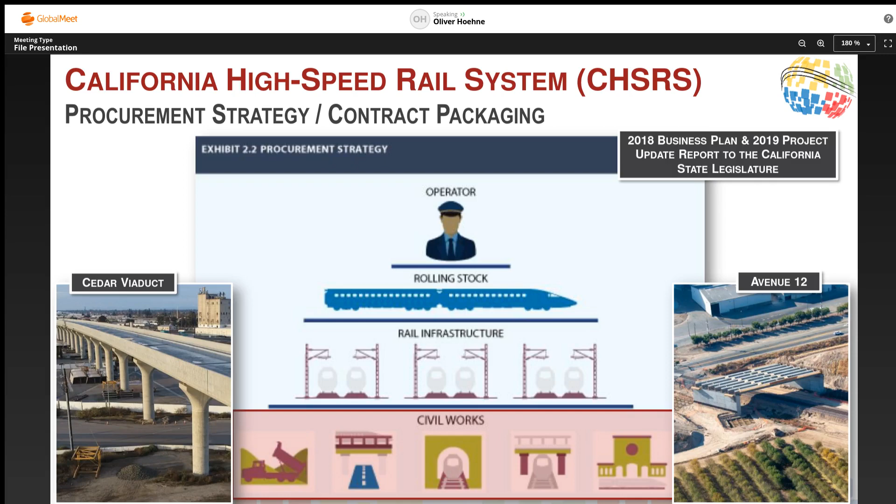And so now let's talk about why high-speed rail is a system of systems, right? High-speed rail, the whole program, is technically even a system element of a much larger system. And if you wonder why, take a look at this one here. It's just one of the YouTube videos you can see.

What you see is we have adjacent railroads, typically freight railroads, and you can see in the upper right corner where we have to cross over a freight railroad. You have adjacent highways. You saw already what we call a grade separation, where the roadway has to be relocated. We have power utilities, which bring in the power to feed the electric trains. California is earthquake country, so we will have to have seismic detection, but we're not going to build a new system. We tie into an existing one.

So that means high-speed rail itself really depends a lot on other things, the context, right? And it's something that we sometimes seem to forget when we build a system. It's fun to build a system, but it has to tie into the existing environment.

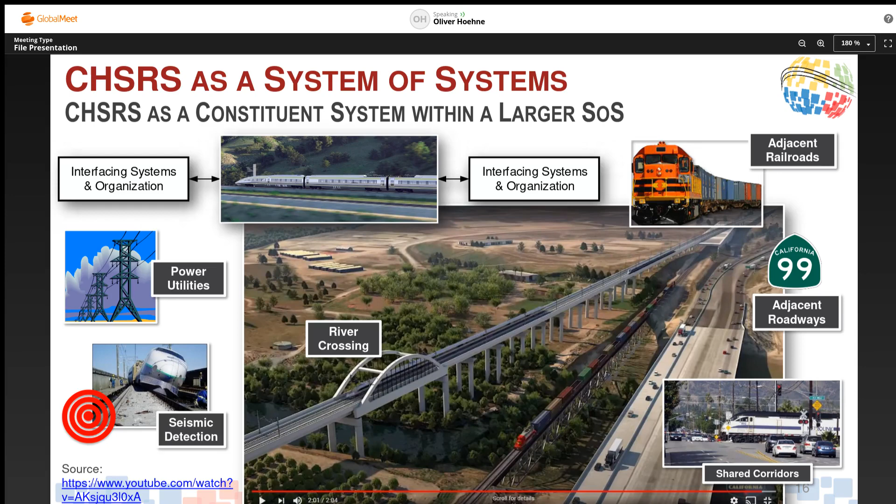Another level of why high-speed rail is a system of systems, and in this case what I would like to call a program of projects: once you take only the high-speed rail portion, you can see that on the program level it's broken down into a number of projects. Those projects, whether civil works, track and systems, or train sets, are basically the constituent systems of a system of systems.

So you can argue that the high-speed rail system itself is a program or a system of systems, of which the projects, the constituent systems, are the parts, right? And so not only do we have to plan for all of those procurement packages, contracts or projects, however you want to call them, but we also have to integrate them at the end of the day.

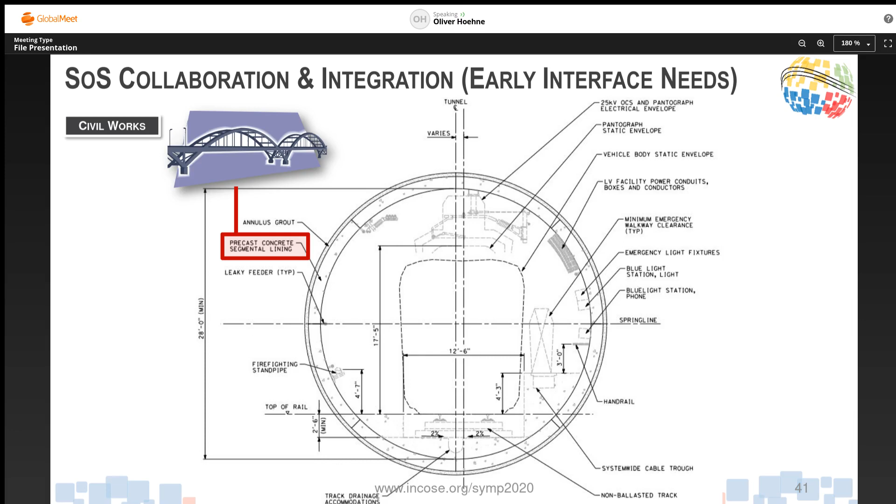Every inch of foot costs millions and millions of dollars. I kid you not, yeah? And so they're obviously trying to optimize it to as small as possible, but also as big as necessary. And so the things that need to be considered, for example, what you see here is the actual size of a train set, right? Which is a train set contract.

You need to know for safety, security purpose or maintenance purpose, you need a walkway, right? How big is the walkway supposed to be? The track, right, the train is going to run on. Is it ballasted track, non-ballasted track? Any system you put into the tunnels, like the radio system, it has to have a certain distance or clearance from the trains, the power systems, you name it. So there's a lot of things you need to know up front in order to design the infrastructure correctly.

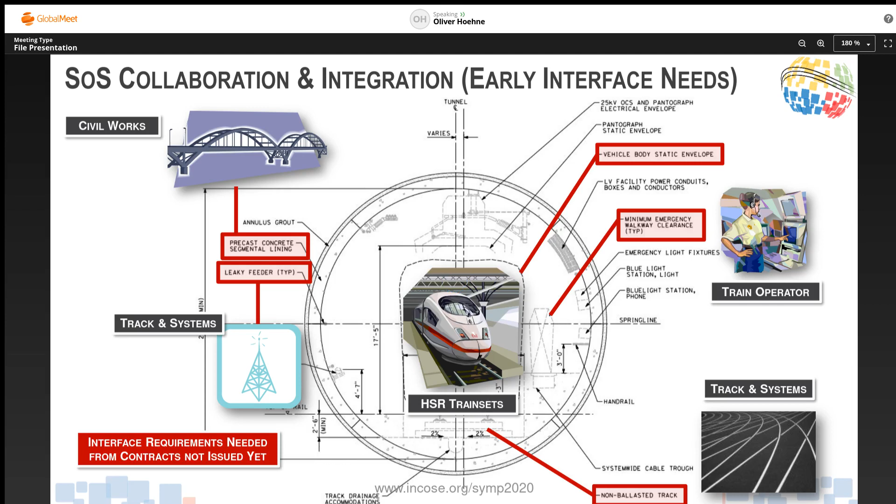But how do you do this if nobody wants to be specific, right? Especially with those contracts that come later on. And so basically, the conclusion here is the interface requirements are needed early on from the contracts that are not even issued yet, right? Which is the key challenge. And last but not least, the emergence we talked about, which is the key challenge.

So what I'm showing you here is basically a cross-section showing a trench. It's like a tunnel without a lid, so to speak. Typically, that's the configuration you see in New York with the subway systems, only that in this case it's open, right? And so this picture you see here is what was put into the contract as a scoping document, meaning this is what we would like to see, right? They're identifying all the key elements and saying, hey, this is the trench, and here are the key pieces, and this is what is part of your contract, and what's not.

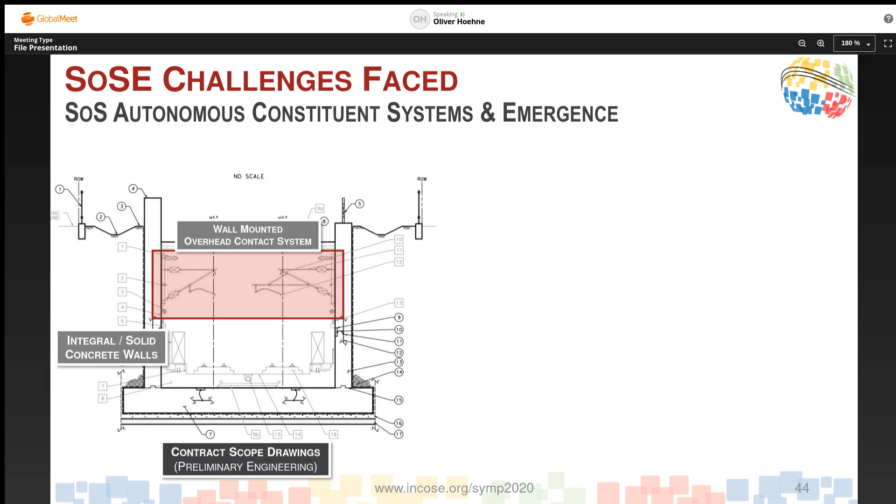But what you see is very, very solid foundations, right? Very solid walls. And what is highlighted here is that the overhead contact system that is powering the trains is wall mounted. And so when the contract was done, right, this is how it looked, completely different. So the idea of putting the catenary to the wall was completely dismissed. And so if you take a look, you can see over here, the actual wall is that thin strip here. It's almost like wallpaper.

So what they did is they decided to use piles and put them into the ground every so often, and then just put a little bit of, I don't want to say cardboard, on top of it, but a very thin wall. And obviously, again, this is all about saving money for the contractor. And because of that, they had to redesign the complete overhead contact system. And the challenge here is to make sure that all those interfaces, all those needs from future contracts like catenary, walkways, as you can see, right, they're all still adhered to.

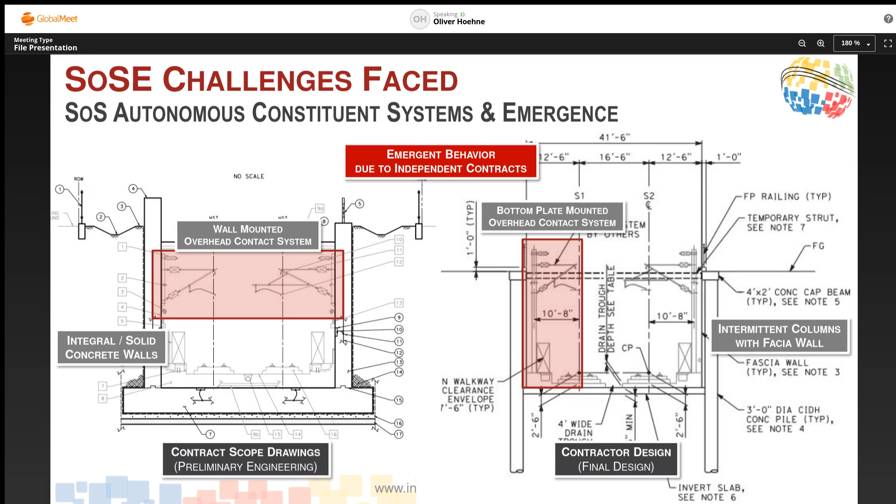And if you're not careful and not specific, the contractor's going to squeeze you as much as he can, right? So the point here is that those pieces that have to come together as one program are so flexible and ever changing, and you have to be careful that they're still integratable at the end of the day. Anyway, so let's talk about the activities we performed to address those challenges.

So the first step is we performed what we call an international best practice review, and so we looked into basically global high-speed rail, especially Europe, obviously, and Asia, right, where those trains are run.

And at the end of the day, I'll show you, we settled for one good documented system. And then I want to talk to you about the SoS integration strategy, and then also a step-by-step walkthrough of how this all works. So the first step is obviously in Europe, right?

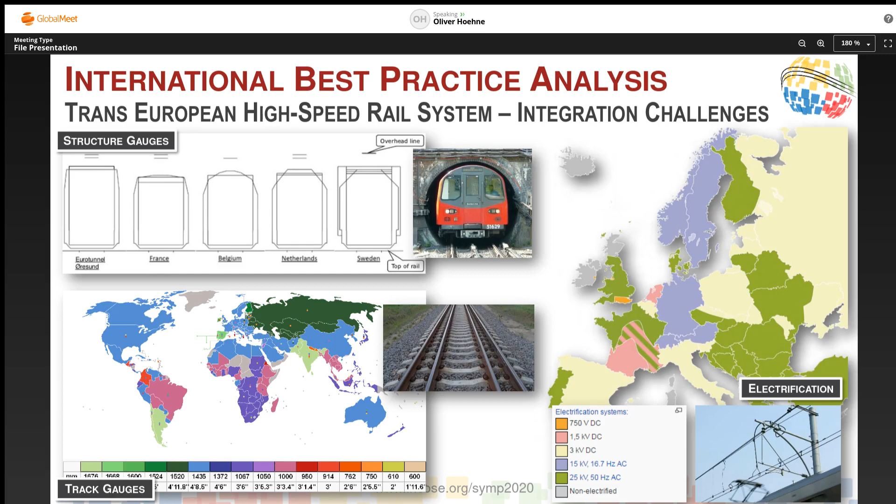There's different track gauges. For example, in Spain, they still have a different track gauge, different power systems, AC, DC, you name it, all the different voltages. And so nowadays you have the European high-speed rail system integrated, and we were wondering, they did this. So how did they do this, right?

And so I'm showing Eurostar, and in all fairness, Eurostar was actually one that was developed in the 90s and still was really hampered by all the different standards. But at the end of the day, the point is nowadays you can really go from London to Paris to Amsterdam, you name it, right?

And so what the Europeans did in '96, they issued what's called the technical specifications for interoperability. And that's really kind of the key source of where we got our thoughts and ideas of how to integrate high-speed rail in the US and California.

So what those TSIs, again, the technical specifications for interoperability, did, they broke the whole high-speed rail system into 8 subsystems. 4 of them they called structural subsystems: infrastructure, energy, control, command, and signaling, and rolling stock. And then every subsystem really was described using the same format. That was really helpful.

And so section 4.3, if you can see it, for every single one of those describes the functional and technical specifications of the interfaces. And so this is obviously, it says down here, the one for the infrastructure. And then in a very similar fashion to an N2 matrix, let's say, infrastructure interfacing with rolling stock, and then interfacing with energy, interfacing with, you get the idea, right?

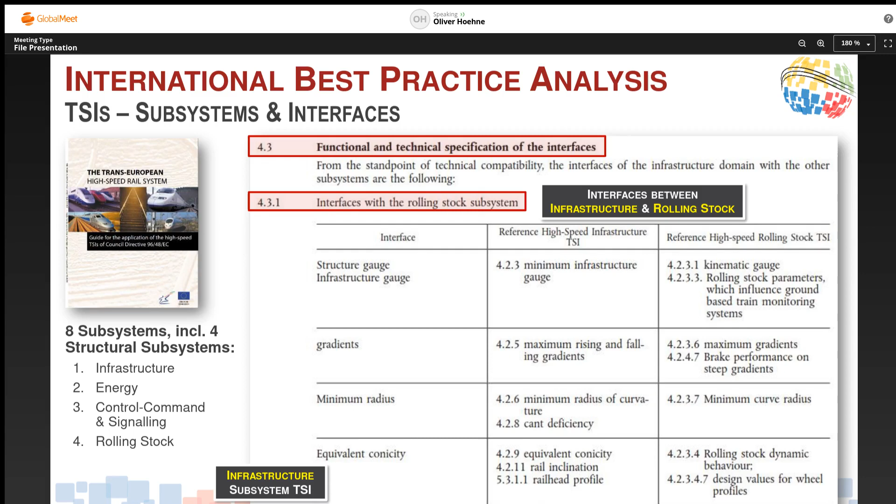And then in there, they're actually listing all the interfaces. And so you can almost say this is actually a collaboration in terms of system of systems, how they developed this. There was not really one document that went into all the subsystems. Every single document had a cross-reference to the other ones. But it was still very helpful identifying the key interfaces over here, and then making reference, in this case, to the infrastructure document and then to the rolling stock document.

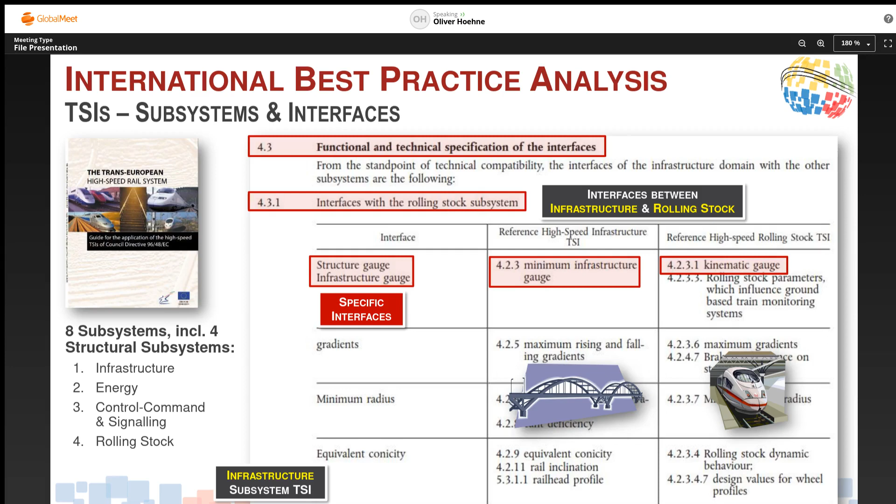And I'll show you on the next page. Basically, if you pick this one interface, which I'm using as an example, now making reference to those documents. So you can see it says structure gauge over here, and then it says, infrastructure TSIs go to section 4.2.3, which is this one over here. And then it says this interface between those two parties, the interfacing party is rolling stock. And then rolling stock go to section 4.2.3.1, which is this one over here.

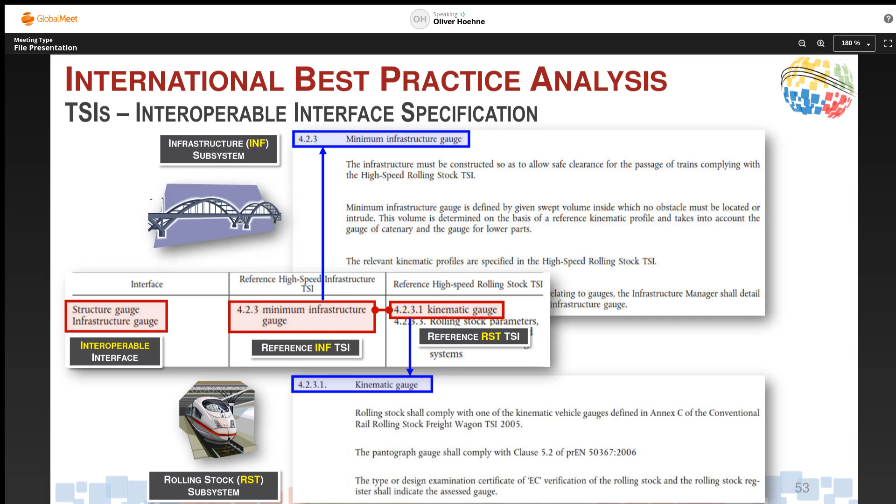And then both are basically described in the way that if every party did what they were supposed to do, you would have an integrated system at the end of the day, right? So one described the infrastructure, one described the train sets. And if every single one did what they were supposed to do, it should work.

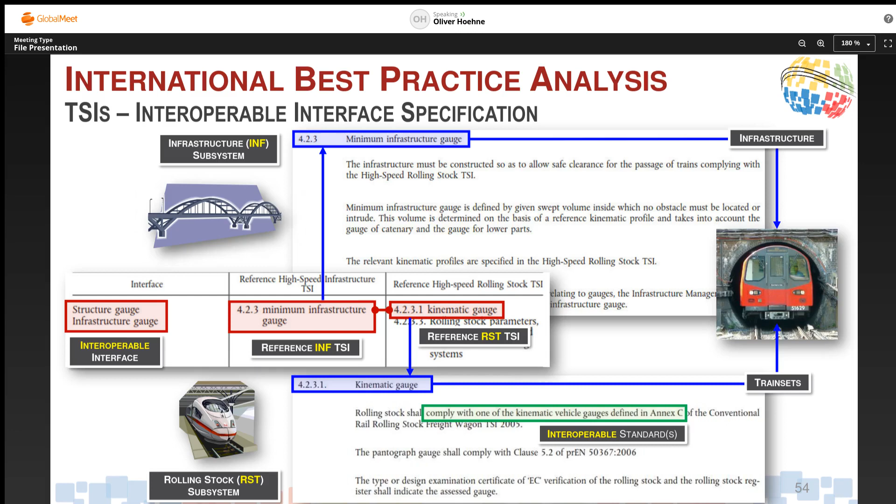And then either they described the interface requirements or implementations directly, or made reference to appendices or even acceptable standards that are out there. So in this case, actually, making reference to an appendix, which describes the interoperable interface standard. And so we really thought this would be very powerful, especially following that example.

And from an authority perspective, obviously the integration team was authorized to do integration, and that's mostly understood as technical integration. So nobody argued with us doing the technical integration. So we basically just ran with it and had at least the felt authority to be allowed to do the integration even across the organization. So we're focusing really on technical.

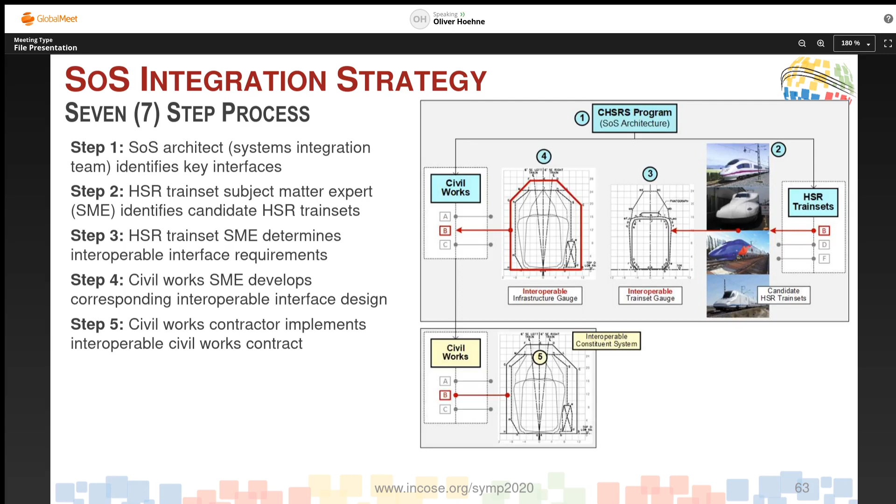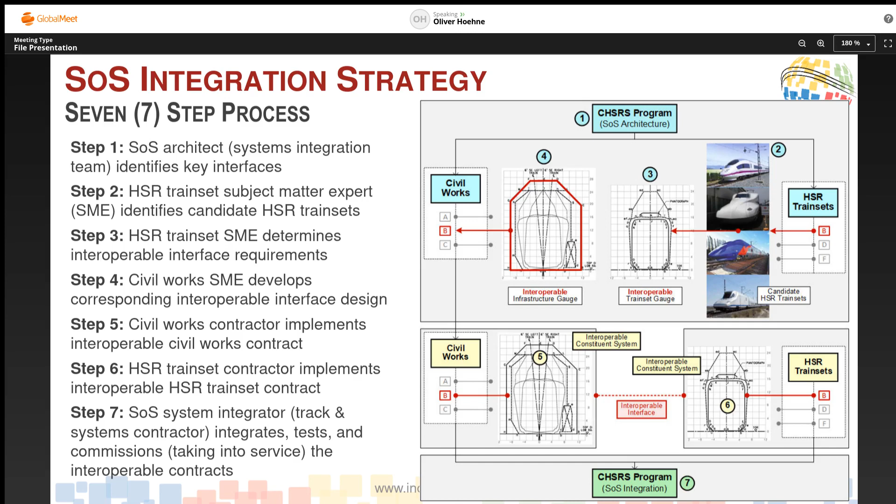So it's being delegated quite often. Anyway, so let's go through step by step, right? Step 1, identification of key interfaces. As I told you already, this is the architecture over here. Can you see the 4 key packages or elements?

And this example would be between the train sets and civil works. And if you can see the B, right, this would be basically the B interface. And it's not only one interface, it's a whole slew of interfaces, you will see. And so basically what we would do is we would make sure that we identify the interface requirements and then make sure that the interfacing party would design the interoperable design, so to speak.

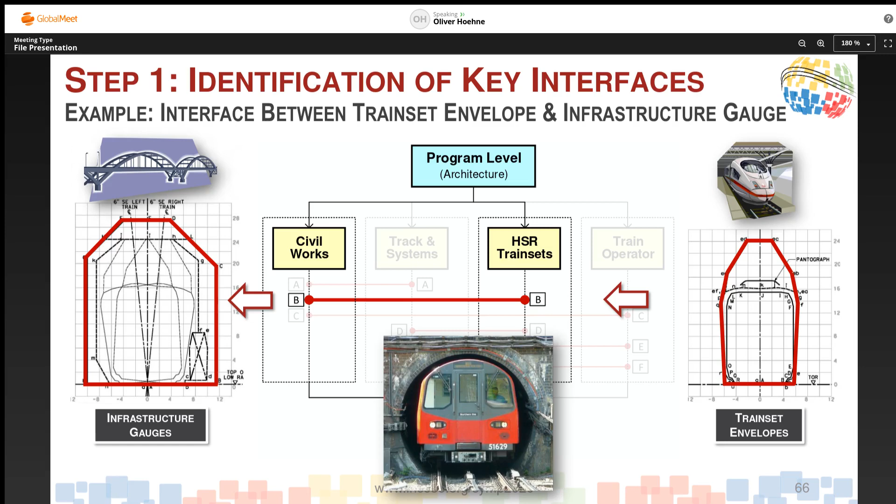So it's still step 1, identification of key interfaces. I showed you earlier, and I just mentioned also, that the TSIs are independent documents which cross-reference each other. And so one of the first steps, years ago, at least 8 years ago, we developed an interface register by doing nothing more than identifying all the interfaces.

So this one over here, can you see, this is TSI infrastructure interfacing with rolling stock. As you can see, it's all done in DOORS. And that's tracing directly to the TSIs, which we all import into DOORS. So now you can filter, can you see it says here infrastructure and rolling stock. So you can filter for all various types of interface, let's say possibly like mapping.

And then what we did is we tailored those interfaces, and we looked at every single interface and said, is this something that should be of concern to us, right? So you can see this is one interface over here, but we created 2 in our own interface register. So we separated the static gauge from a dynamic gauge, meaning one train basically not moving and then the train moving, as 2 different interfaces. And then that resulted in originally 49 infrastructure interfaces to rolling stock, or actually only infrastructure interfaces, of over 100 interfaces that we tracked in our own project.

So if you recall, if you ever go through the CSEP certification, never ever use a baseline from a different project without tailoring. So you can't just copy and paste. You have to think of, does it make sense or not?

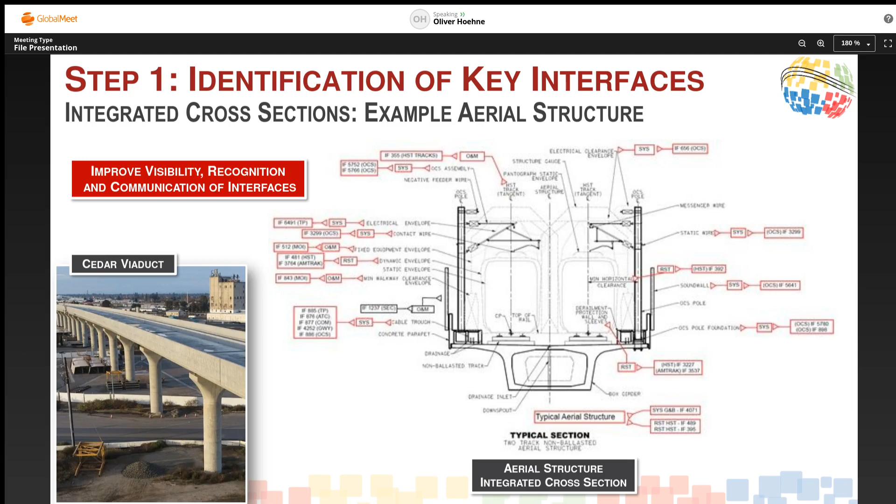And as you can see, look, this is a full build-out, right? And this is only what the civil guy built. So we better make sure that all of this stuff, right, can be built later on here. I mean, if you ever have to go to hundreds of miles of infrastructure and modify that, that would be a very costly mistake to make.

And then what we did is the next step, developing the interoperable interface standard. So in this case, you have a Shinkansen, for example, right? And then you have a TGV. And so you can have double-decker trains, and you have the Shinkansen extra wide. So we couldn't really rely on existing standards. So basically what happened is we developed our own standard, right?

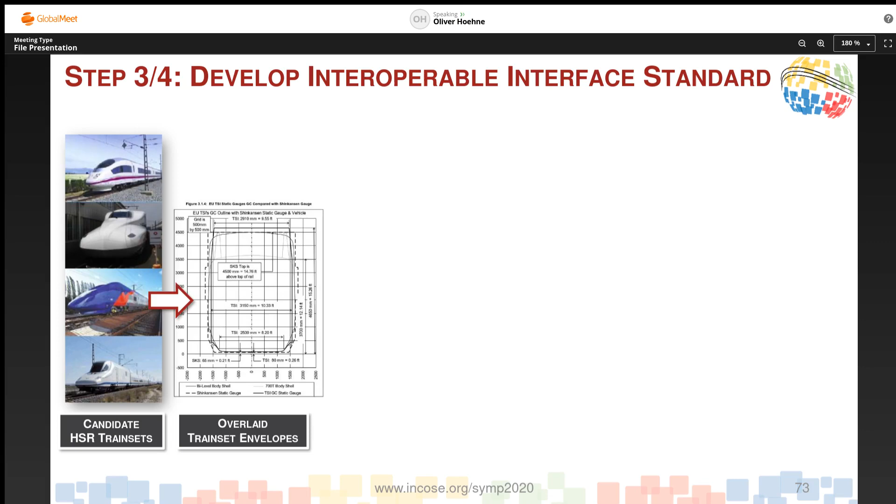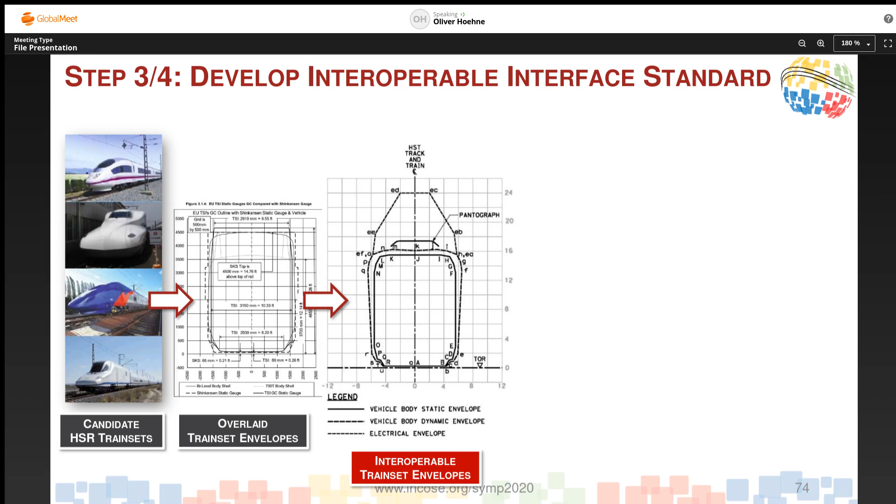By just even overlapping all the different envelopes, and then developed one that became our standard. That's really the interoperable train set envelope. And as you can see, it looks like a train. And this is all about the catenary and the pantograph. And then finally, last but not least, taking this one and deriving the actual infrastructure needs out of it.

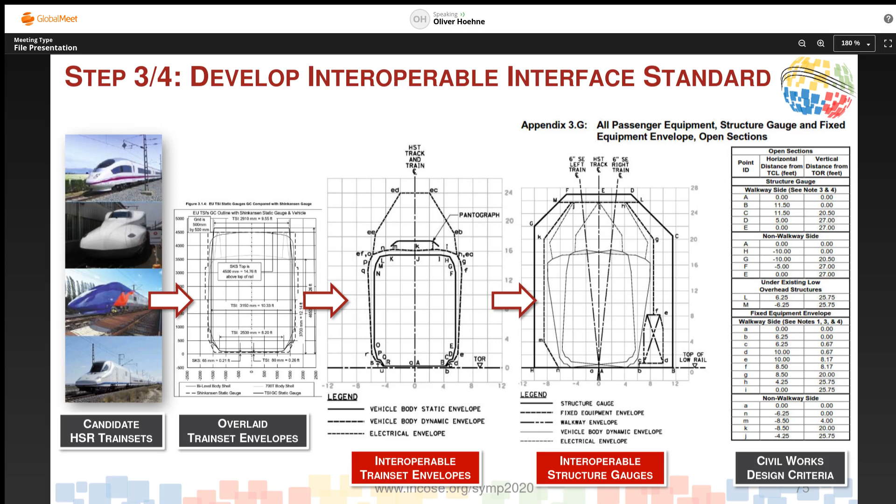And then obviously the trains, if you ever took a train and go into a curve, the train leans into the curves, right? So you have to make sure all of this works. And so this is step number 4 already. And so now step number 5, saying, okay, fine, now we know how big the infrastructure has to be for this specific interface. Now we can go and issue the civil works contract.

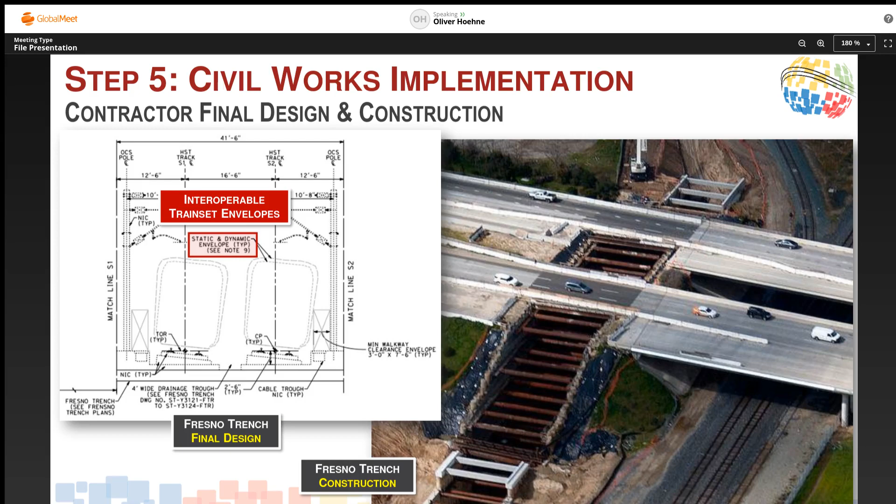And then as part of the civil works design, we have what we call a trust but verify approach. Continuous verification, we call this a V&V process. So the contractor, with every submittal they give to us, they have to do requirements management and have to understand the complete set of interfaces they have to deal with, which if you have, let's say, a trench design, which interfaces apply to a trench, which apply to an at-grade. And then we have two different trenches. We have Fresno trench, and another one's called Jensen trench.

And so they have to give us a list, and this is just an excerpt here, a simplified one that we call certifiable items list. And in here is actually the interface we just talked about. And then they say, okay, in my submittal, it's on sheet number so-and-so. So basically, with this submittal, they have to give us what we call a V&V submittal. They have to list all the criteria, all the interfaces in this case that apply, and then have to demonstrate compliance to us, meaning this interface is addressed on this drawing as the name says over here, right? So can you see the clearance diagrams? So we can be assured whatever infrastructure they're building is ready to take on later on the future contract.

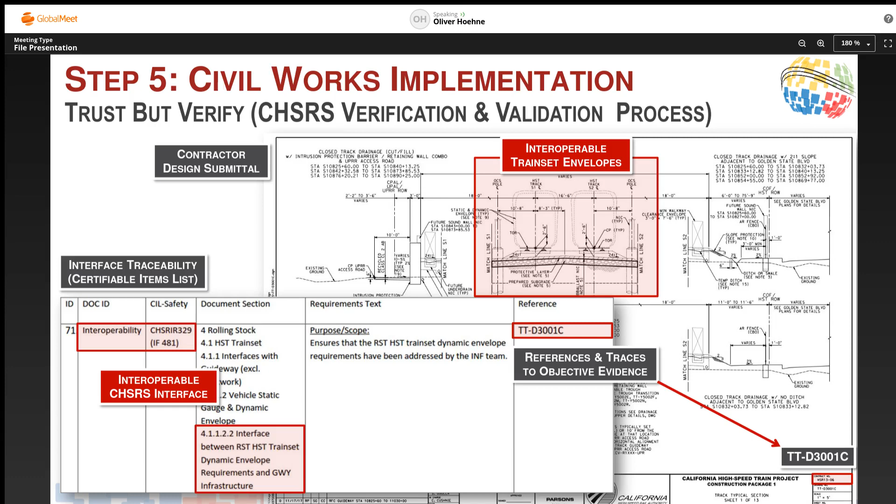And then, last but not least, right? So now, if you have performed step 1 to 5, if you recall, right? And we are in civil works right now. The next step would be now to procure the high-speed train sets. And as you can see, we started out with, first we identified the interfaces, we identified the candidate train sets, we have the interoperable envelope, right? The train set envelope, and then we gave this, can you see the interface B, to the civil group, and they defined the infrastructure gauge, and then they're building this.

So now if the train set contractor is picking any one of those trains over here, right, basically sticking to whatever our candidate train sets are, otherwise you would have to follow the change process, then those two should perfectly integrate at the end of the day for this interface, right?

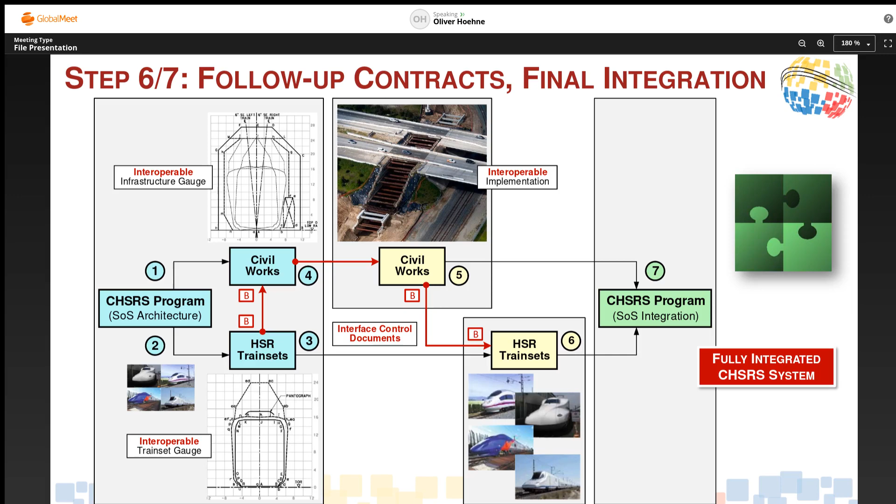So the only thing you have to do, quote unquote, only, is do this now a few hundred times for all the different interfaces. Anyway, that's really what the whole process is. So let me just walk you through quickly what I just showed you, and then also what the achieved outcomes were.

So basically, I showed you a little introduction to system of systems, and also told you that you can go to the INCOSE store. Briefly talked about high-speed rail, why high-speed rail is a system of systems, talked about the typical industry challenges, without even looking at this from a system of systems perspective. Then I talked about what this means if you look at this from an SoSE perspective, such as emergence.

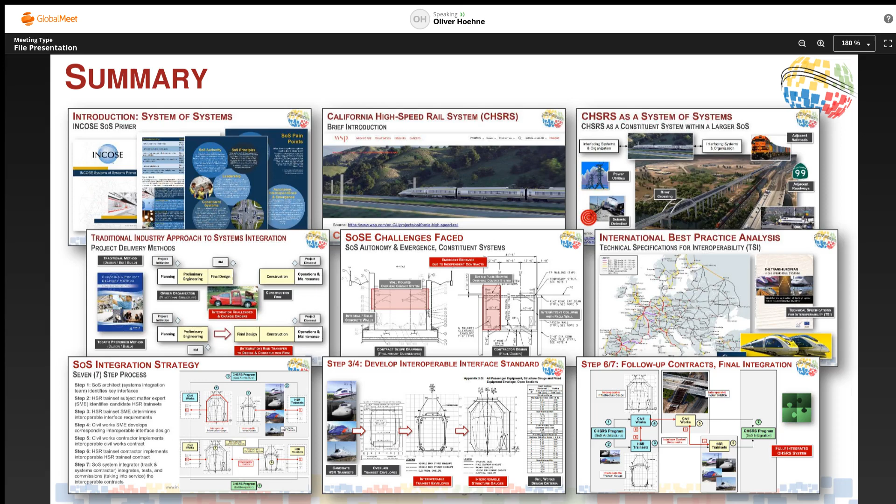Then we looked into best practices, right? What are other countries doing? What can we learn from this? And then our own approach, what we basically tailored out of this. And I walked through how it's being done and how this all leads to successful integration. So having said that, what were the achieved outcomes?

So specifically from an SoS authority and leadership perspective, we maximized our authority by focusing on the technical systems integration. If you try to go into the realm of business process modeling and organizational integration, you probably get your hands slapped quite often. We also demonstrated leadership by developing a tailored system of systems integration strategy based on proven international best practice. We could always say, hey, if you don't trust us, trust those guys, right? So really reference power, if you want.

From an SoS architecture perspective, the architecture really became the procurement strategy. And since we didn't develop a separate procurement strategy, everybody accepted it. And because it's only four key elements, it was also very easy to get key stakeholder buy-in. In terms of collaboration and integration, we worked closely with all the subject matter experts. As you could see, we worked with rolling stock and the integration, right?

And in terms of autonomous constituent systems and emergence, this whole approach allowed what the design-build is looking for, contractor innovation, allowing what we call SoS emergence without negatively impacting the integration, as long as it sticks to the interface.